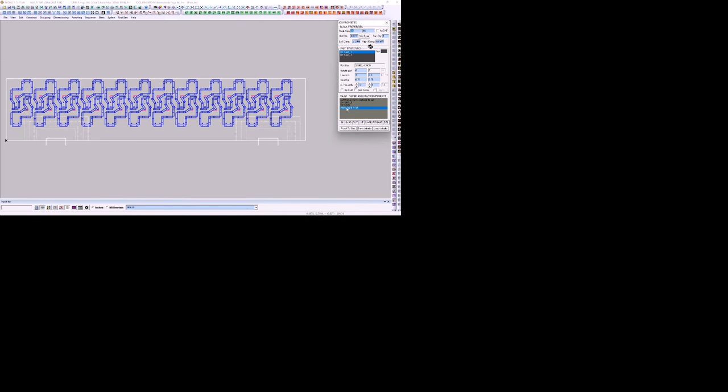All of these components are going to become one assembly. They belong to one assembly. Once we punch them and form them, we're going to assemble them. So you can actually handle thousands of sheets here. That's why it's called super assembly.

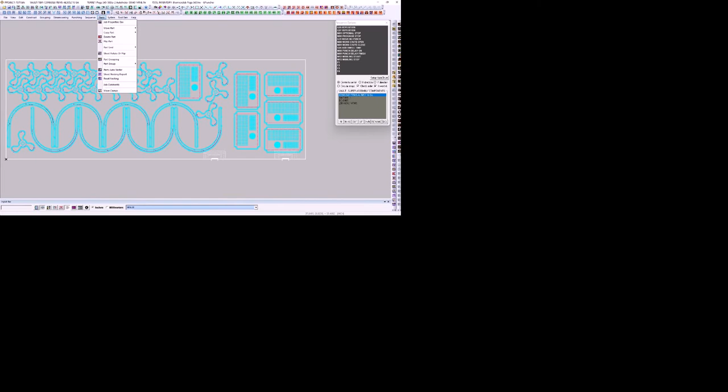And once you have the sequence and everything, for example, we can see the sequence here, you can generate a report, and I'm going to do so. The report is located in the blank menu, and it's called sheet nesting report. I'm going to update the super assembly vault where all the components are.

Right now you have some information about the current job, but you want to switch to all of them. It gives you a resume of what you're getting in this full assembly: the part names, in parentheses the flat size and the area, and then how many you're getting on the right.

When you punch this project, let's go on and print the full report. It's pretty easy. You have some options here. When we generate the full report, you just click print full report, and I'm going to save it in program, sketch line, blanks, printing test, and it's going to be called full report.

Let me correct the name real quick. And I'm going to generate it. I just click save, and JETCAM starts working, numbering the parts, and switching through all the components, and eventually it will generate the report. So let's give it a second. It's still working.

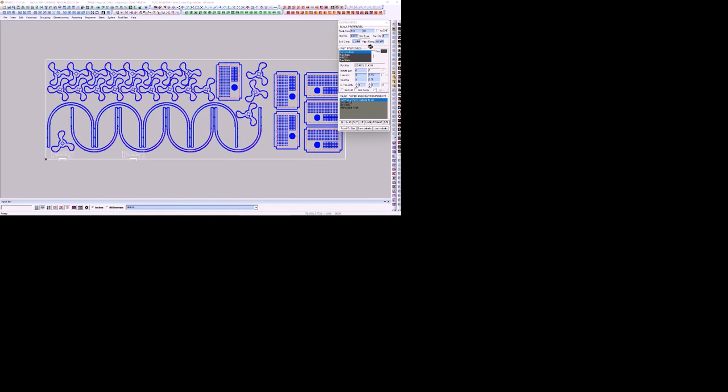The PDF, we're going to open it. It might pop up on my other screen, so I'm going to have to move it to this screen because I have two monitors. It's called full report, and I'm going to open it and move it to this screen for the video. On the top, you have the full resume of what you're getting. Let me minimize a little bit.

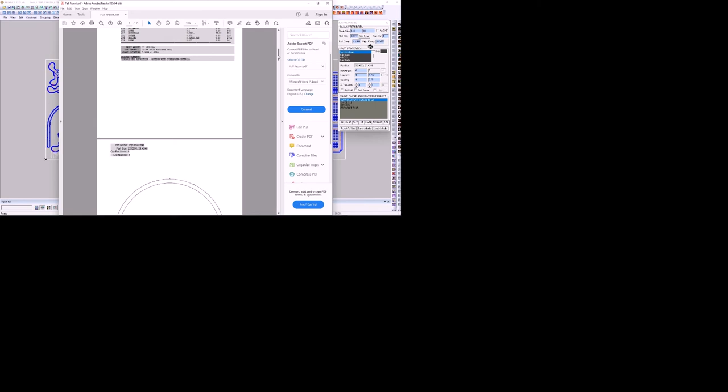If you go on, you start getting the setup sheets. In this case, it's the first sheet, the one that has all the components, multiple parts, and they're numbered 1, 2, and 3. If we scroll down, you get the parts in that particular sheet by number: number 1, you're getting 8 per sheet, number 2, number 3, and then you get the sheet, which has numbers on it to identify the parts.

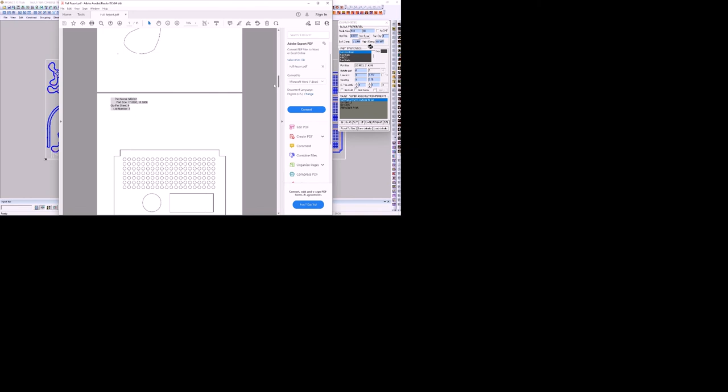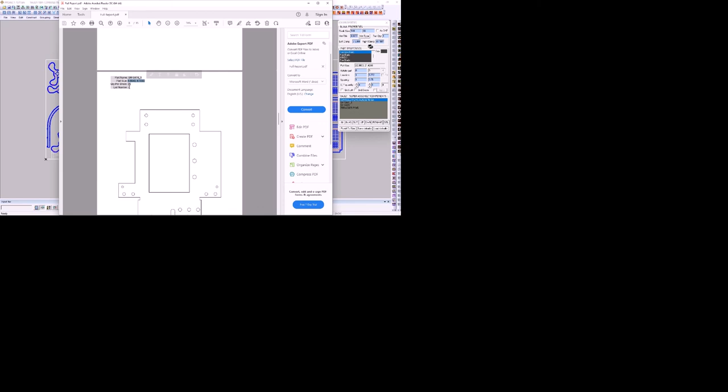I'm going to scroll down. Then the next setup sheet pops up. It is for the second component, this component right here, SM-S441-1, and same thing. This item is number 4. As we scroll down, you get the part with some information: the flat size, item number, and how many you're getting per sheet.

Then you see the actual sheet with the clamps and what you're punching, and so on. You can go through all of them, and it's the same thing. I finally got to the bottom, and that's how you generate the report. It's full of information, which is what you will need for your punch press operator, laser operator, or the office people.